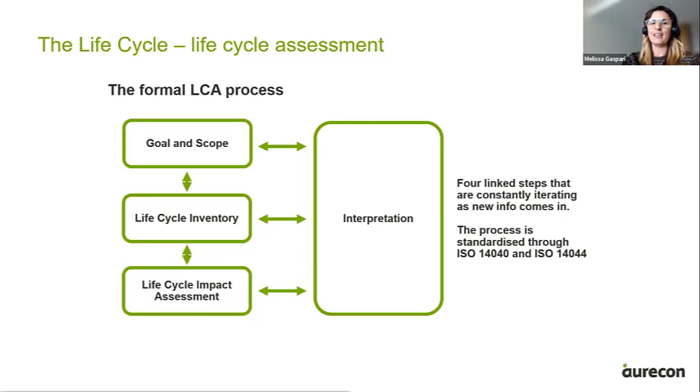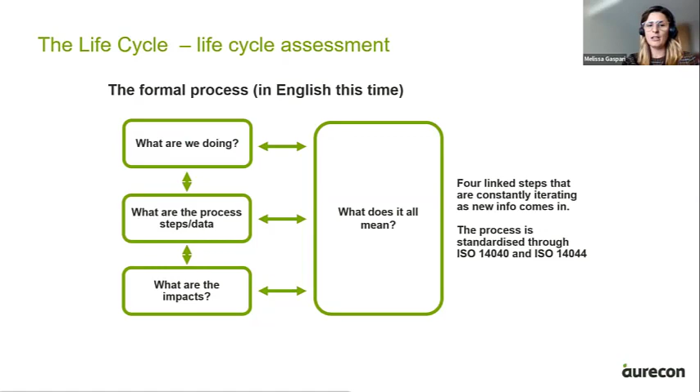And so in English, as I say, it's 3 real steps. What are we doing? What are the processing steps and data to what we're doing? What are the impacts of that? And that iterative step again of, okay, well, what do all these things mean? How do I apply them? How do I make decisions based on that process? It's still a pretty abstract concept, I think. So when we bring it down to a building, there you break down even further. These 4 concepts turn into a bit more of a process.

So at this stage, I'll also caveat, you also need to consider the physical and temporal boundary when you start talking buildings. So there's a physical boundary, which is the site of your building and what comes in and out of that site. But then there's also the temporal boundary. We design buildings for a set lifetime. They have a service life, a design life. And in LCA, we normally consider that to be 60 years.

And I recognize that that's a little bit out of step with the National Construction Code standards, depending on the importance level. And it's also a little bit out of track with each individual item's service life in a building. So it's a little bit arbitrary, but it's also based on some pretty good academic studies that residential buildings in Australia tend to live for 100 years plus, whereas commercial buildings tend to be refurbished at the 20-year mark. And when you look at the whole building stock and average it out, it's somewhere between 50 and 60 years, which is kind of where we're designing for anyway.

So considering that boundary, physical site and temporal of 60 years, we've got a couple of stages. The product stage, which includes everything from raw material extraction, processing, transportation between the processing of products. So a raw material might go to maybe 3 or 4 fabricators or manufacturers before it would go as a complete product to site, which then pushes us into the construction phase, which includes the transport of a product to site, the construction, installation, energy, water, waste of those products, including things like excavation works.

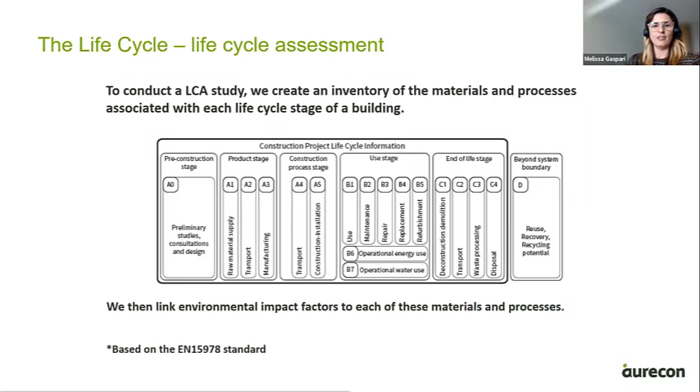Different bodies use different definitions of upfront embodied carbon, cradle to gate. Even in the new Green Star tool, they give you two different pathways. If you do an LCA, you're looking at a pathway of A1 to A5 to your upfront embodied carbon. If you use a simplified pathway, it's A1 to A3, but it's under the upfront embodied carbon credit.

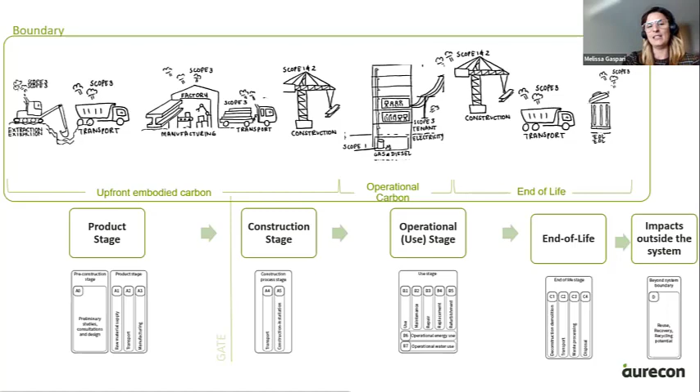So be mindful of those terms when you're in this space. They can get confusing and you can think you're all talking about the same thing, but sometimes not so much. So to complete an LCA, to actually do this process, you need data. There's a lot of great sources of data, and the depth of the analysis you're doing will determine what kind of data you want to use.

But essentially, the way I like to think about it is an LCA for a building is a little bit Inception LCA, kind of like the movie, where you're doing an LCA on an individual product and then you're just adding all those LCAs together for your whole building and extending them out. And if you struggle with that abstract concept, which I have many times, I like to think about it in terms of orange and orange juice.

The LCA on an orange would be like the LCA on a building product, but to do the LCA on orange juice, you need to actually include the LCA on the orange. So the orange is your building product, concrete, facade, that kind of stuff. Your orange juice is your building. That may or may not help you, but take what you will.

And now in terms of data and where it comes from at this base level, orange level LCA, there's a lot of different LCA methodologies. There's the process-based LCA and there's the economic input-output LCA, and then there's the hybrid of the two. They're sort of the three main types.

Primarily what you're talking about in buildings is process LCA. We're building the LCA up from the bottom. We're taking the actual supplier data or processes and building them up together. Economic input output kind of goes from the top down. It uses the economic data to analyze and determine material impacts. But because it's based on economic value, it's not necessarily always applicable.

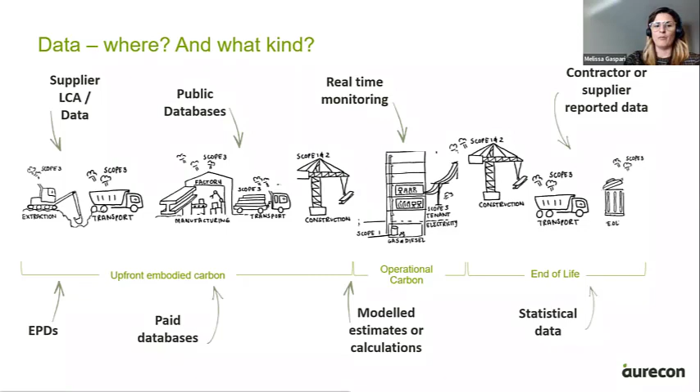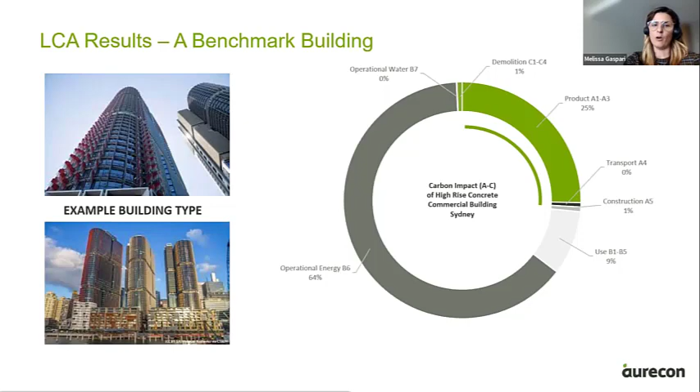Concrete and reinforcement take up 50% of the impacts for the A1 to 3. So basically you're looking at about 12% of your total building impact over its 60-year life. That's pretty big. So there's a lot of things we can do in that space to reduce that or make use of it. Similarly, facade, a facade has a lot of elements in it, glass, aluminium, a lot of energy or carbon intensive elements. So they kind of come up next.

And then you're seeing things like flooring. There's a lot of floor space in buildings. Even though it in itself is not necessarily a very intensive product, it adds up pretty quickly. Similar to some of your other finishes, waterproofing, even your services. There's quite a lot of metal, plastics, and materials that go into running services throughout a building. So that's a standard kind of high-rise building.

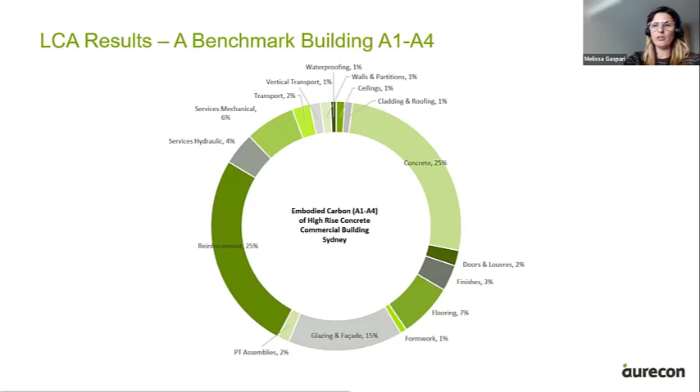When we compare that to a timber building, it shifts a little bit, mostly because one, we're not in the high-rise space, we're now in the mid-rise space, but also we've got some cool things happening with timber. One of those being that the material itself is about 40% lower embodied carbon than its concrete and reinforcement equivalent. These are approximate numbers, they're rule of thumb, they're not perfect, and they'll change depending on each individual building, because we never really build the same building twice.

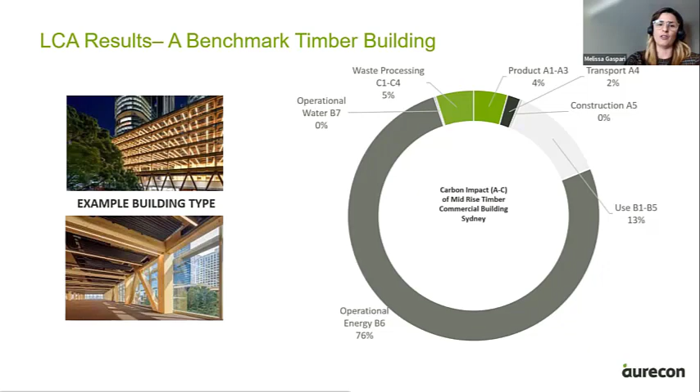But you can see obviously the operational use phase becomes a little bit more significant because we've now reduced the total impact of that A1 to A3 phase. There's a few things that happen with timber when we move into just looking at that A1 to A3, A4 phase. Because timber has a sequestered carbon element, so a biogenic carbon within it. In other words, it's taking carbon out of the atmosphere and storing it in the product itself, and it's quite a bit of that.

It has this kind of negative carbon inherent in itself, and for a whole bunch of reasons, some good, some bad, we don't count this within the life cycle of a 60-year building, mostly because the other standards around offsetting, carbon accounting and reporting for national averages, carbon footprinting, basically report it year on year. So, the tree was reported as sequestering carbon in its financial year while it was growing. Similarly, offset standards tend to say that we need to sequester carbon over a 100-year life cycle. And if we can't embed it in a building for 100 years, technically we can't count it.

So buildings, we kind of lose that element a little bit, but even without that, it's still a lower embodied impact than, say, a standard concrete product. But there's kind of two ways to look at the product stage. There's one including that negative number with the timber and one excluding it.

And you can see the relative impact of elements like reinforcement, glazing and facade and flooring kind of shift quite obviously. And it's something to be mindful of, that life cycle thinking approach of just taking a step back and going, well, can I or can't I include that negative element, and should I or shouldn't I, and how should I report that when it comes to the building?

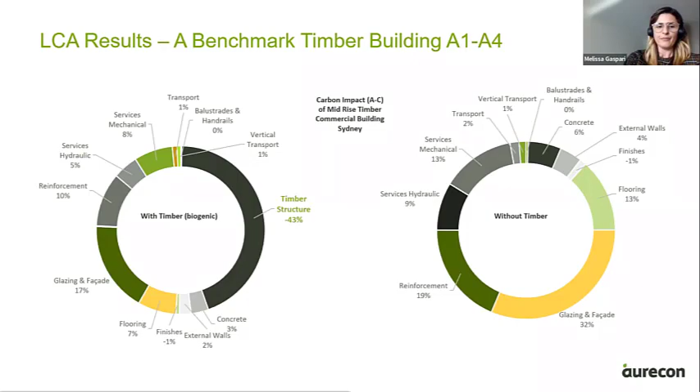So jumping next into our case study. So 25 King Street, I had the pleasure of working on this building both from the Lendlease side of things and from Aurecon. So I've kind of experienced it from the developer constructor as well as from the tenant, which is a super interesting kind of approach. So it's a building I've got a lot of passion for. And I actually haven't seen it complete, so I will definitely still be making a trip to Queensland eventually.

But it's a 9-story commercial building. It's Aurecon Queensland's HQ. It's an all timber construction with some lower concrete levels and supports. You can see there was a whole host of people and awards that it received. So it's by no means a small feat to build a timber building, but definitely a fun one.

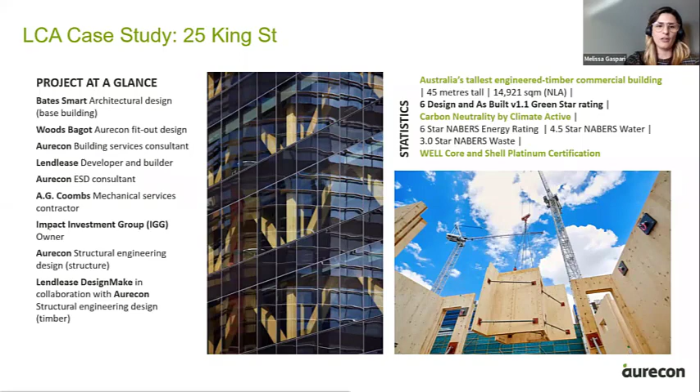So the LCA results. The LCA results are for Green Star certification in this case. So it complies with EN 15978 for building LCA. And the indicators used reflect the standards at the time of this study, which was a few years ago now. The assessment is also comparative.

So that means we use a reference case and a design case, where the reference case is a standard practice construction, which would be a concrete structure meeting the minimum energy efficiency requirements and the like. So it's very standard, we didn't do anything special. We met the minimum building requirements we needed to, but it's the same kind of functional use, size and shape

of our design case. And our design case reflects the actual building, what we designed in the end, all of the improvements that we put in, whether we changed reinforcement styles, construction materials, so in this case, timber, whether we made changes to facade, all of those things, it reflects the actual building.

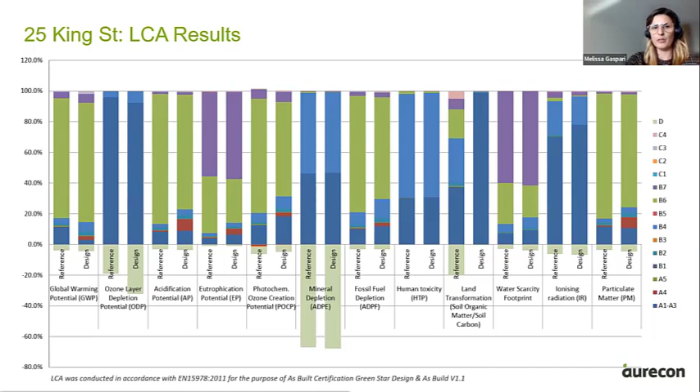So you can see the number of indicators that were reported for this building. You've got everything from global warming potential through to water scarcity, land transformation. And you can see that the different modules listed on the side there have varying impacts at different stages. But I'm going to give you another view of just the carbon, the global warming potential results, so you can get an idea of what is happening.

This is what the life cycle looks like when you're just comparing the reference and design cases for global warming potential across the building. Obviously, the grey, you can see there's quite a reduction in some phases and then quite an increase in others for a whole host of different reasons.

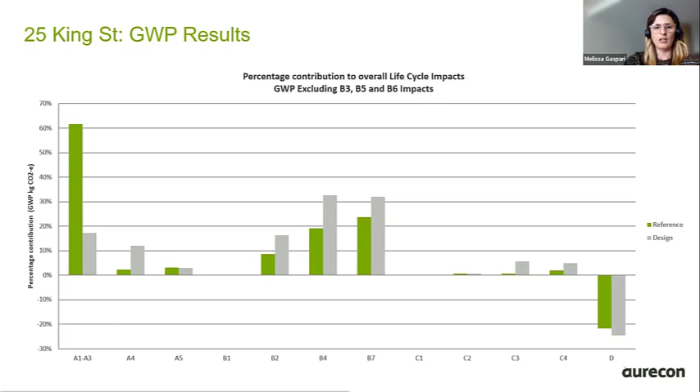So now I'm going to zero in on embodied carbon, looking at modules A1 to A5, and that includes products, transport to site, and construction. And this is really to illustrate lifecycle thinking at play and how you can use lifecycle thinking and lifecycle assessment together. So you can see that the design case, dark green, is performing much better than light green.

And looking at transport, so the A4 component, you notice that the design case actually increases. And ultimately, this came from the timber structure itself. So the CLT and glulam were transported from Europe, and compared with more standard products, concrete and steel, which were focused on more local transport routes, the timber was European and had quite a significant transport route to capture. And I'll point out here that these results are not just the timber results, they're everything in the building.

So this is the transport for all of the building materials. So the increase seems a little odd, but we're talking about a pretty large volume of timber procured over quite a significant transport distance. So you're looking at the transport from Europe over train, shipping, and then road transport to site. It can still have a pretty material impact despite being a pretty short and sharp piece of the construction process.

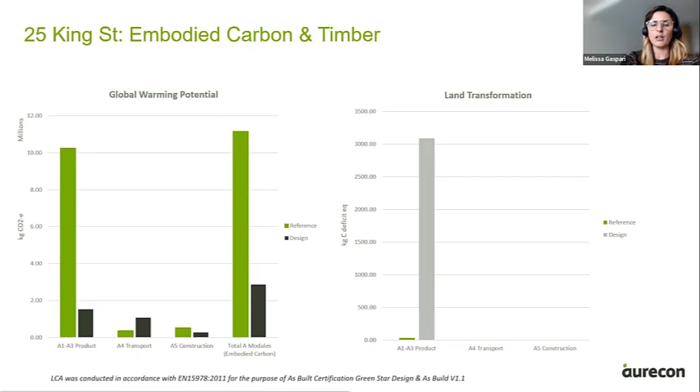It's also about using products with EPDs, not a standardized product, potentially a greener product that specifically goes another distance again to reduce its embodied carbon impacts. There are a whole number of concrete mixes used on this project that in liaison with the concrete supplier were targeted to reduce their embodied carbon impact. So that's where that 28% comes from.

16% for reinforcing, that includes recycled products and reuse products. So again, it was another engagement with the supplier to say, hey, we're not just going to use a standard off-the-shelf product. We want you to provide us with a low embodied carbon product. And in some cases, we even requested the offsetting if that product was over a certain impact to make sure that we could reduce the impact of reinforcing on this project. Similarly, we did the same thing with post-tensioning. That was more a design initiative there of optimizing that structure and process.

And then the last one, ceilings, it's 1%, but essentially 25 King Street doesn't have any permanent ceilings installed. So you can see all the exposed surfaces, but just the removal of that one single product still had a quite significant effect on that quarter of an impact of the whole life cycle of the building. It's 1% out of that 25. It's pretty big for a product we kind of wouldn't look twice at when we think of the big hitters in building.

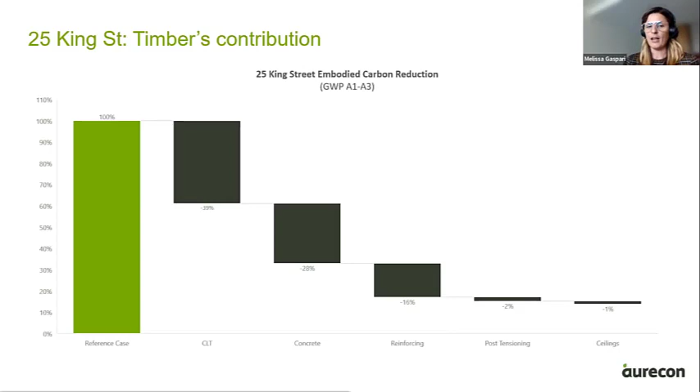So our development managers are able to go, okay, what did you do? What were your initiatives? Show me that evidence and take that life cycle thinking approach. Because this next item is kind of just a holder for saying our life cycle thinking decisions accumulate. So every time we take a step back and go, where does this fit in the broader life cycle of the building? We'll be able to add another initiative to our sustainability agenda. So

I'm a big fan of life cycle thinking to anything and everything, but life cycle assessment is really the place where you let your sustainability experts dive into the detail, give you the data, and then allow you to step back and have that conversation about splitting the data a few different ways and looking at it from a few different perspectives and asking, what initiative have we made or can we improve on this?

So just to round out the discussion, some benefits around timber. There are a lot of them, but anyone who works in our 25 King Street office is a pretty big fan. Natural element timber gives a sense of well-being and higher productivity to staff. Everybody loves the fact that they can see all the services running through the building, and they're not painted, they're nothing special, they're just stock standard services arranged neatly because they're visible. But it actually gives people a sense of awe that they're in a working and functional building that people really love.